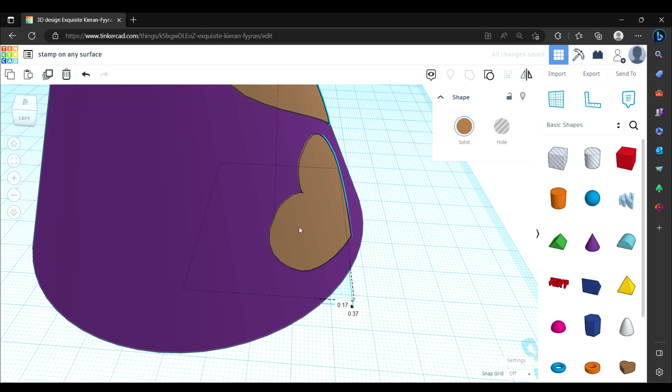Hi, this is Xsurge Mech Prince, and today I will show you how to stamp icons on any surface using TinkerCAD.

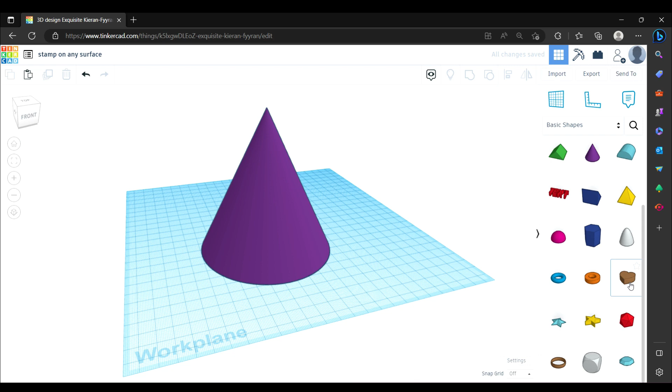First, load a model you want stamped on. Then, load your favorite icon. Put your icon onto your model. Resize your icon such that it completely sticks outside of the model.

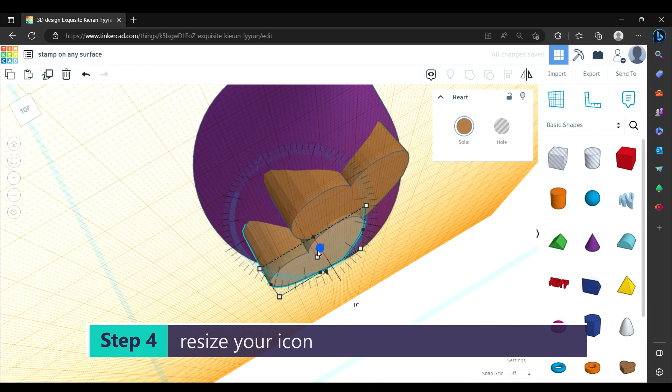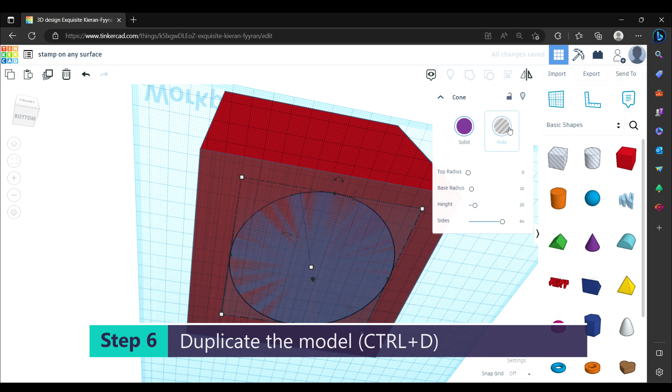Get a cube and enclose the model and the icon within it. You can leave some of the model exposed so that it is still accessible. Duplicate your model by pressing CTRL+D. You will have the duplicate automatically selected.

Set it to hole. Group the hole version of the model with the cube to perform subtraction. Make the original model invisible by clicking the light bulb at the upper left. This leaves the icon and the subtraction cube visible.

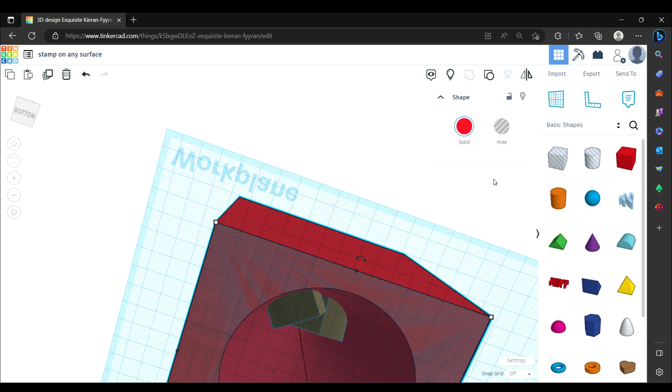Set the subtracted cube to a hole. Group the icon and the cube to perform another subtraction. Click the light bulb button to make all hidden models visible again. Slightly move the icon for it to completely stand out. Now you have successfully stamped your model.

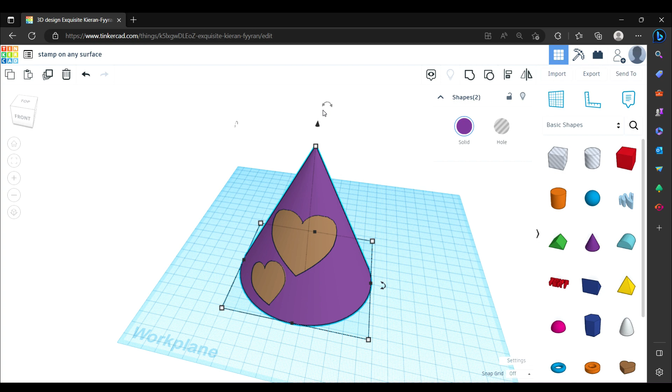We will do this on 2 more models. The steps are still the same. You can skip to just look at the finished models. Enjoy!